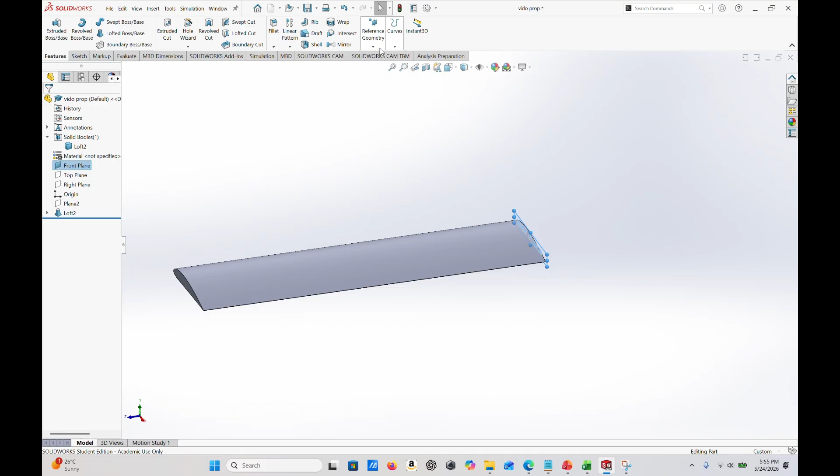So to start with, we're gonna want to make the front plane visible, and after that we're gonna wanna make two reference geometries. First we're gonna make the first plane, and we want to make sure that the offset is flipped. So click on flip offset and change this value to 17.42, and then click OK. You can clearly see we use the front plane as our first reference.

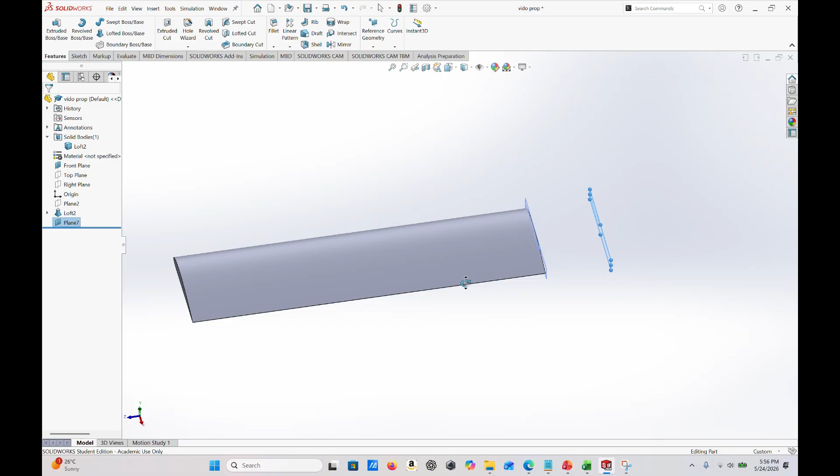And click OK. We want to also make another reference geometry. By this time we are selecting plane 7, so the first reference is the plane 7, and we want to make it so it's 10.58 but on the opposite direction. So click on flip offset and change 17.42 to 10.58.

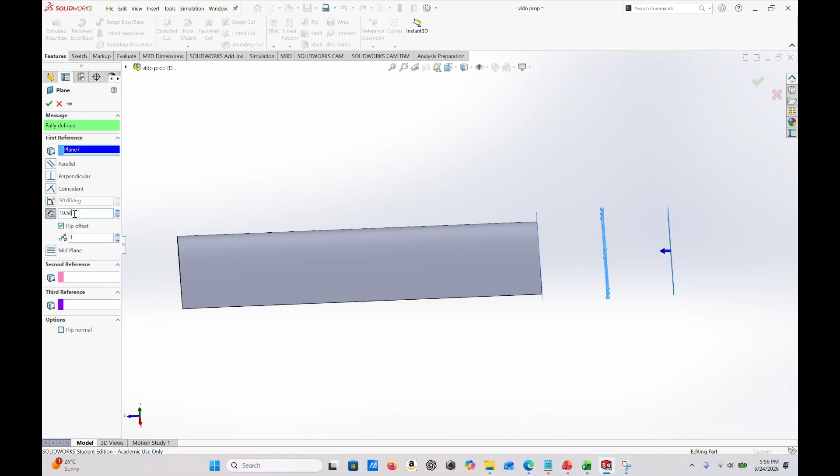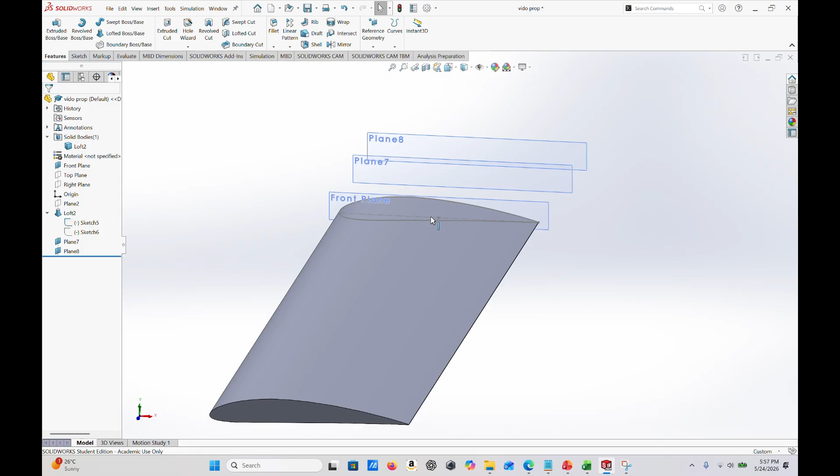And this is where we're going to draw some ovals which will connect the blades to the oval parts, which is then going to be connected directly to the disc in the center. So we want to first show you guys how to draw the center line and the center point. We need it because we want to line up the oval with the center line. In the video when I made the untwisted propeller, this wasn't shown clearly, but in the twisted one we have shown. But I'm gonna delete them and redo it for you guys.

So first click on edit sketch on the front plane. You can see it is connected from the origin to the trailing edge in the center. So let me just select those, delete them and show you guys how it's done. First go onto the line, onto the arrow, there will be center line. Click on it and just drag the line from the origin to the center between the trailing edge.

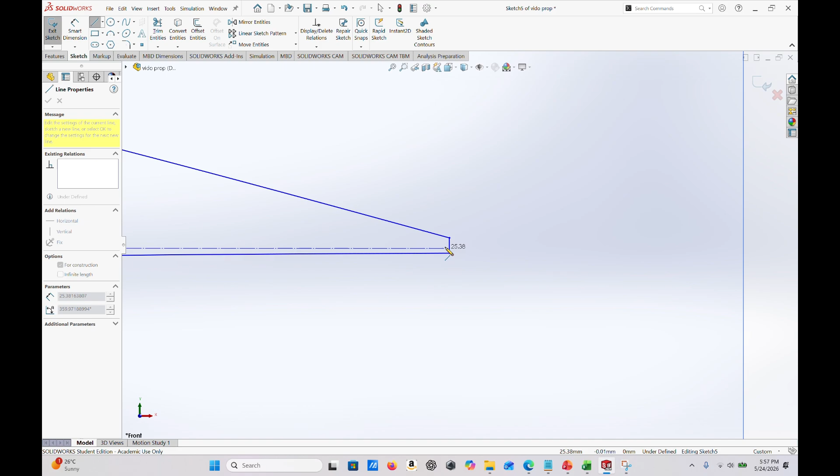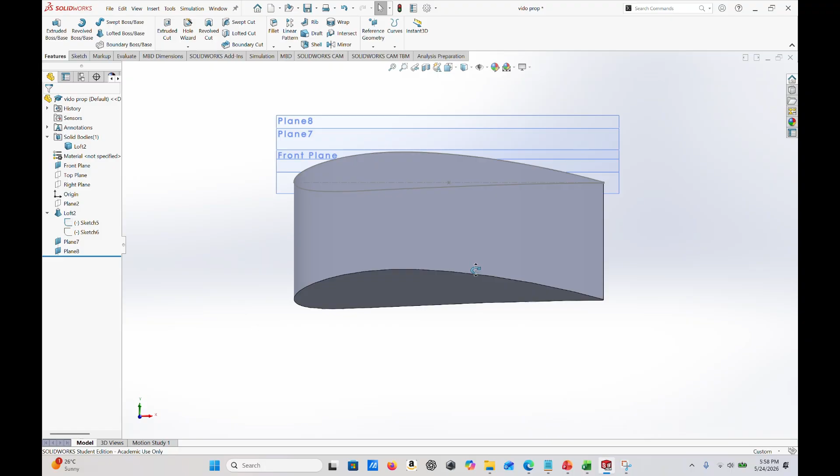And then click on the dot, and then hover over that line, and you can see the yellow dot. You want to click onto the yellow dot, which will give you a point. So we can use that point to make it easier for us to draw the oval. And when we overlay plane 7 and front plane, or plane 8 and front plane, it makes it easier for us to position that oval and make it straight.

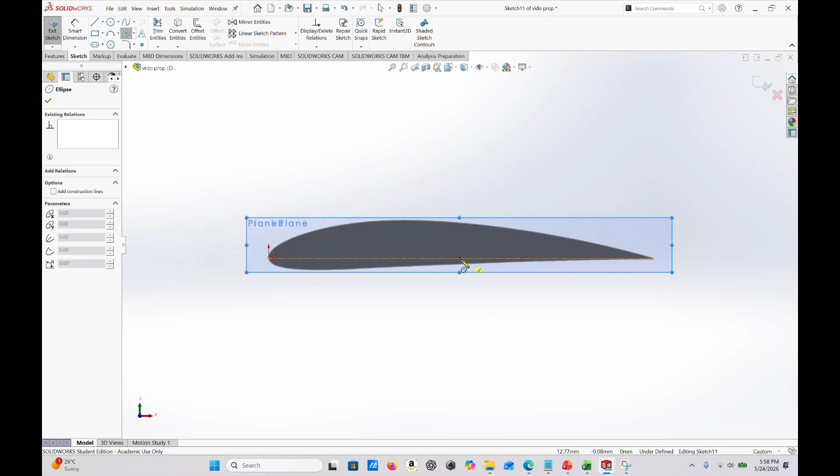So we are editing plane 7, as you can see, and now we want to draw an oval. So we're going to click on this oval shape and then just drag from the center, or the point that we just made. Click on the left mouse once and then again twice, and then it will show you the values. Now on the left hand side, we're gonna need to edit this radius. So in the first one, we're gonna put 6.25.

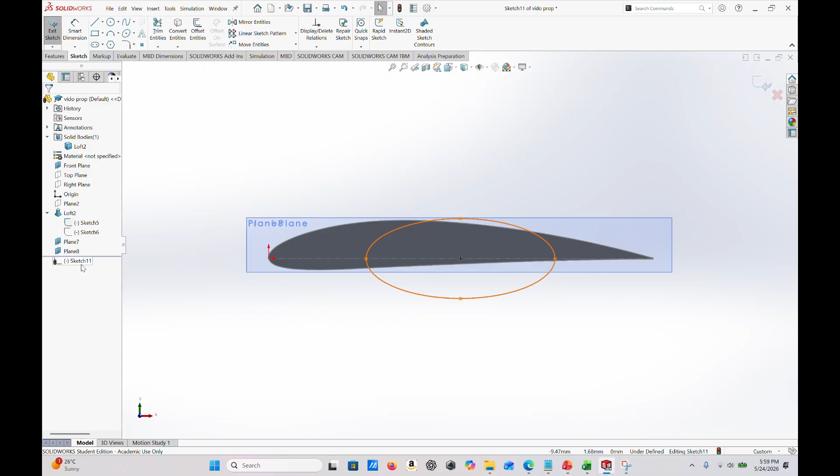And then click on it again. And then on the second one, we're gonna write 2.625. And it will change it. And this is how it's supposed to look like. We can exit. And now you can see how it's supposed to look like on this plane 7.

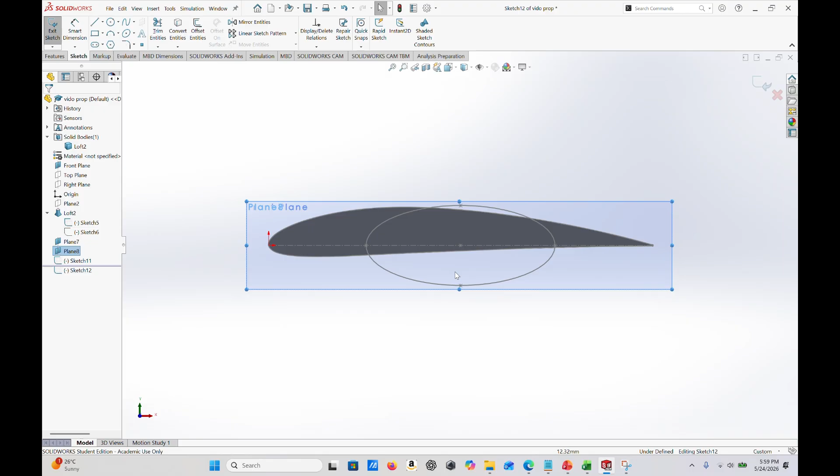Again, the planes can be named differently for you guys. Probably gonna be named plane 2, maybe, I'm not sure. But now we just want to go to plane 8 for me, and then edit the sketch. Click on the line and convert entity. So now it duplicates that oval onto plane 8. Now you guys understand how convert entities work.

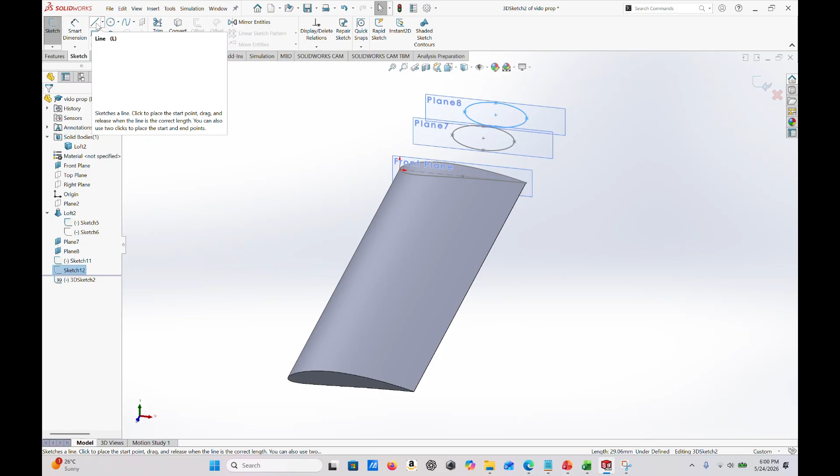Now you can see what we are trying to do, where we want to connect all these planes, the front plane, plane 7, plane 8 together. So we're going to go to 3D Sketch, and we're going to just insert lines where we're going to connect the leading edge to the left side of the oval and the trailing edge to the right side of the oval. So click on the dot.

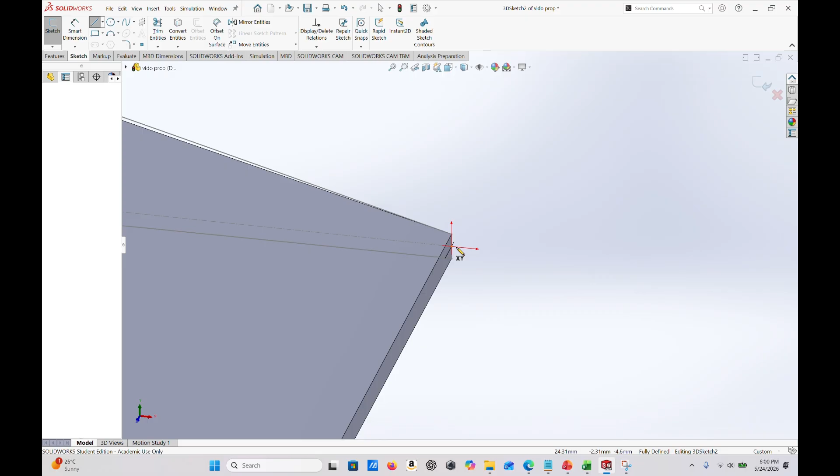You're going to see there's a dot. Just hover on it, click on it, and drag, and just connect these dots together as shown. We're going to do the same thing for the trailing edge. Make sure it's in the center of the trailing edge, and then just click on the dots on each side of the oval.

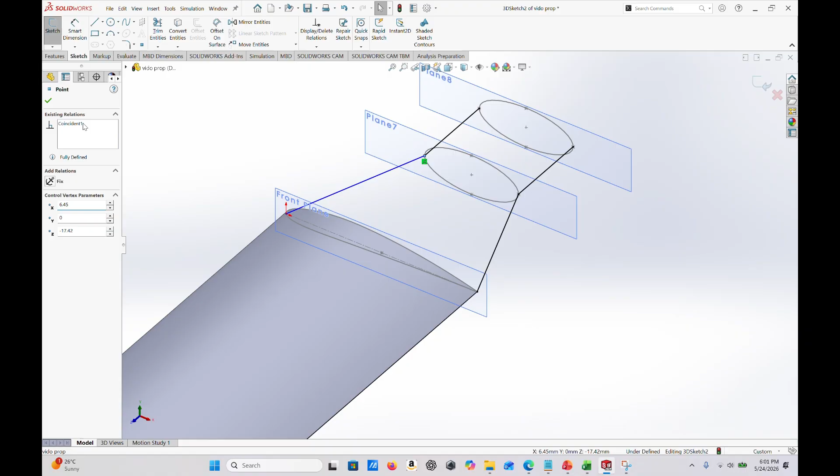And now you can escape this 3D sketch, and we're gonna use this while lofting, so the loft knows the lines that we want to have a limit on while lofting. And now we want to make sure that the existing relations, this is very important, are being deleted. You can either click on that small green icon, it will turn blue and then delete, or you can just delete it from the left hand side by just clicking on it and deleting.

And you're gonna do this for the 6 dots that you have done. So we've done the leading edge part. Now we're gonna do the trailing edge. Delete. I'm showing you guys both ways, so you can see you can delete it from the left hand side or on the front panel. Now that we're done, we're gonna use loft.

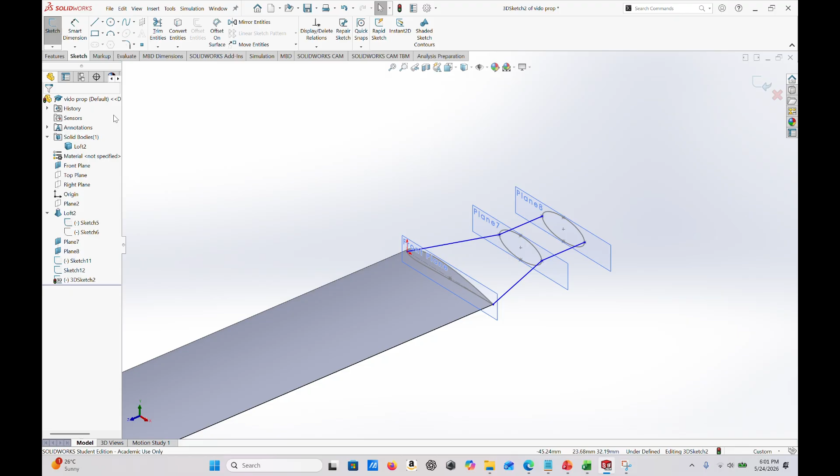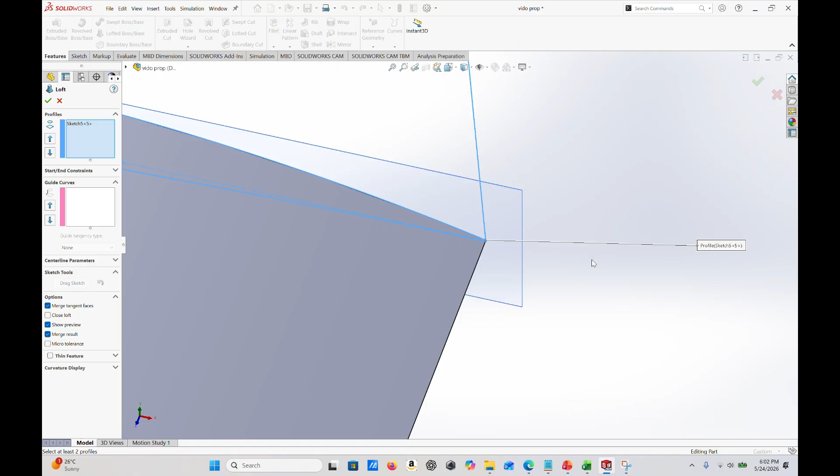And the reason why we remove the relations is because the loft will not work. It won't show us the option of using the 3D sketch because it is related to the other sketches, meaning the airfoil and the ovals. So now we're just gonna connect the sketches together. So we're gonna connect the airfoil to the 2 ovals. You have to do them in this consecutive order.

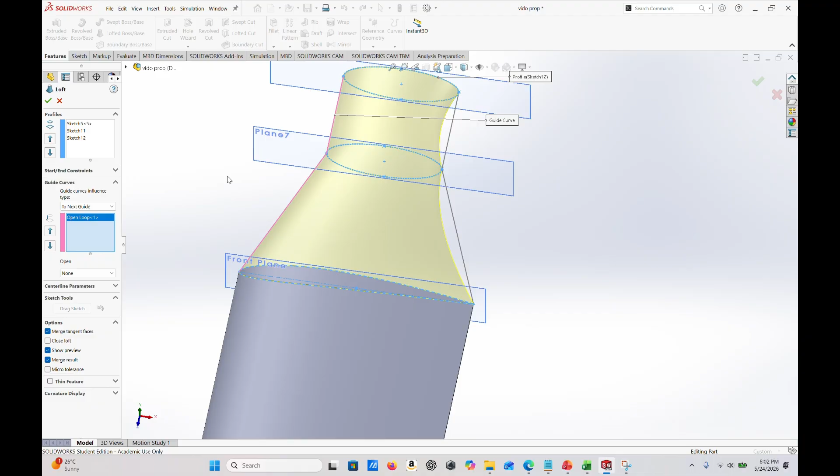So airfoil, then the first oval, then the second oval, and then go to guide curves and make sure you click on the 3D line. And you can click on this, which says OK. You can see how it's bent on one side. You want to do it on the other side. You just click on the line and click OK. And now you can see that everything is connected nicely. And also the trailing edge, you can see that it also shows the pattern on the oval.

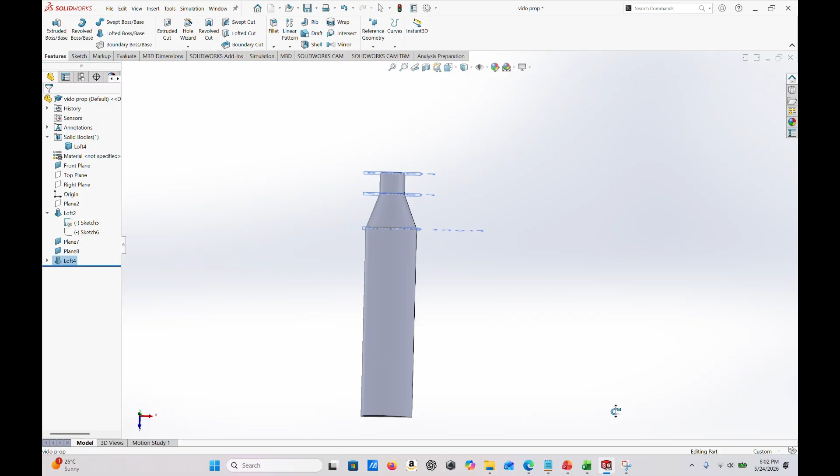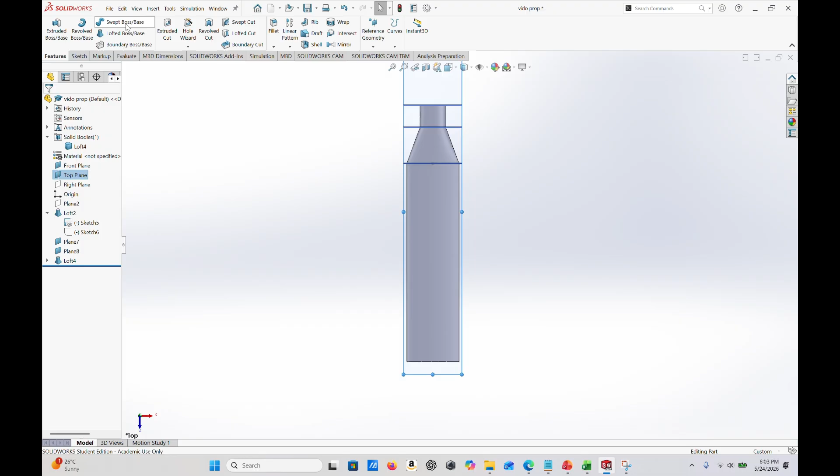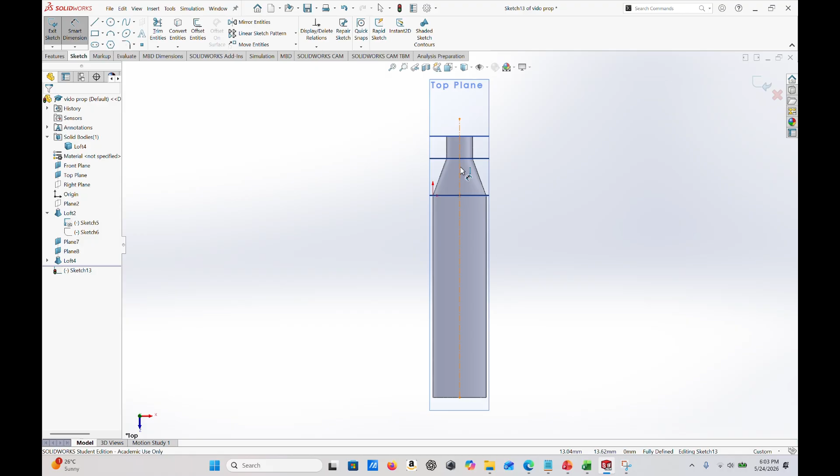So first we're gonna go to top plane and make that visible. And we're gonna construct a line so we know where the center of the radius of the circle for the disk is. So to do so, we want to do a sketch onto the top plane, and we're gonna make a construction line, or we can call it center line, and then just hover onto this, and you can see that you can select the center, and then just drag the line till ahead of the final oval. And then we can go to smart dimensions and change the value to 127, and you can see that the length of the line slightly changed, so it starts basically from the tip towards the center.

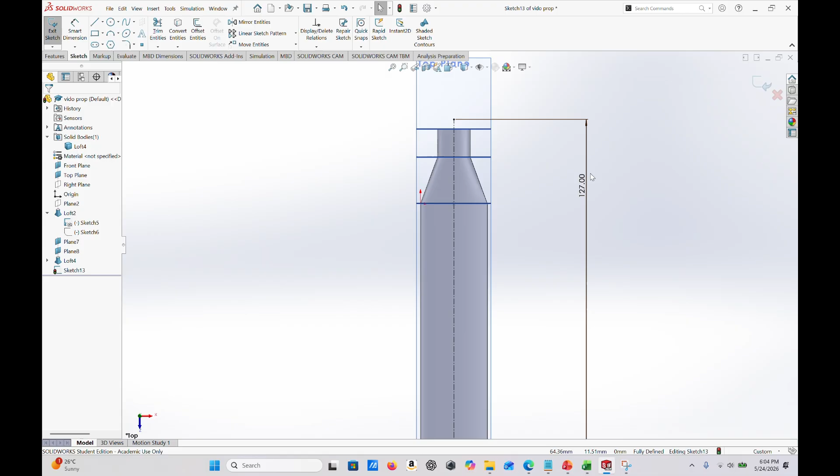Now we're gonna go and make a sketch on this top plane by just drawing a circle. And to do so, we're gonna just click on the circle and just drag the value. And here we're gonna choose a specific radius. In this case, we're gonna change the radius value to 31.75. You can use smart dimensions to change, but it's easier just to do it there on the left. And then just click OK.

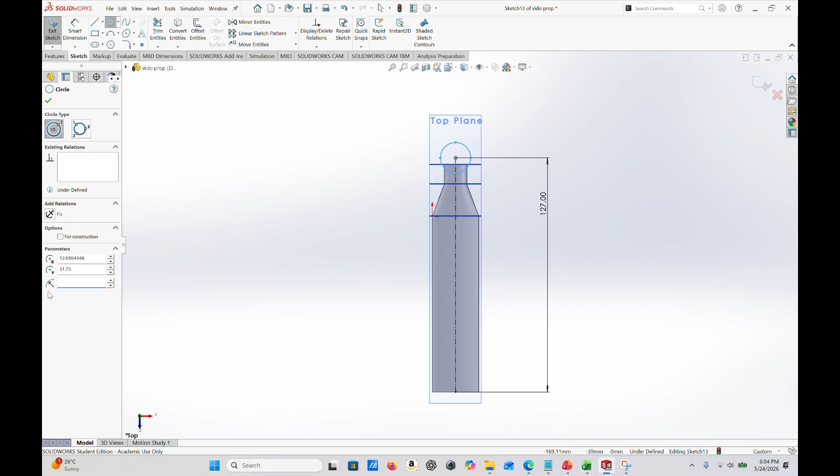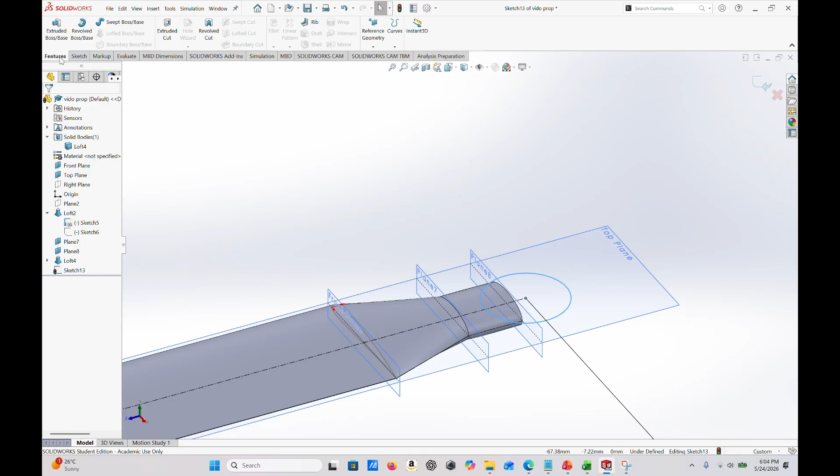You can exit sketch, but we don't want to do that now, because we're gonna want to extrude this. So we're gonna go to features and then to Boss-Extrude. And this automatically already does the circle. You can select the circle so it does it. You need to make sure that on direction one, it says mid plane and it says 6 millimeters. And there you have it. You're gonna have the disc being shown.

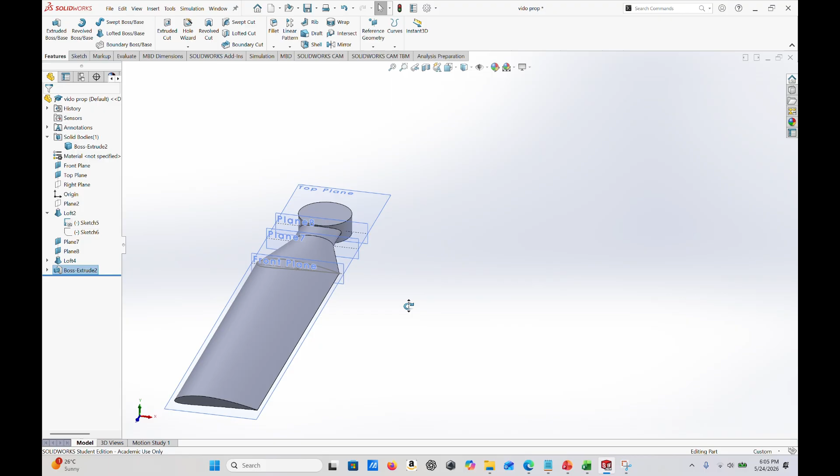And now we have made basically one half of the propeller, and all we have to do is just mirror this blade onto the other side, but we need to reverse directions. So if it spins 180 degrees, it actually is facing the same leading edge.

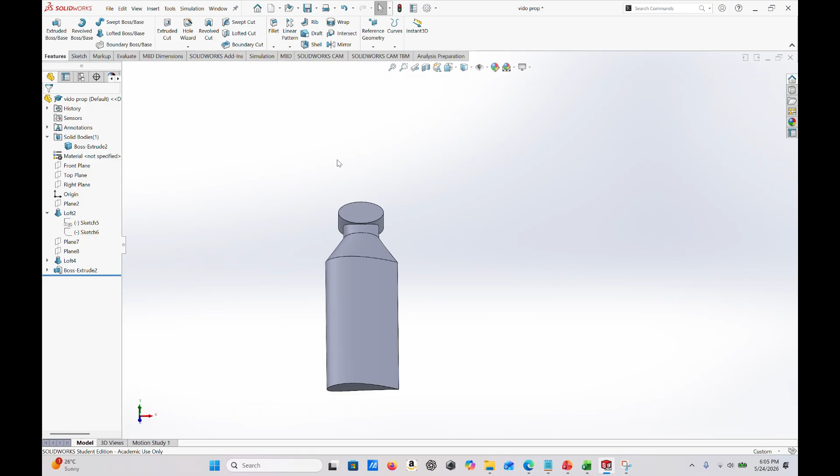So first we hide everything to make this simpler. We're gonna go to Boss-Extrude and we wanna make sure that the sketch is showing, because we're gonna need that point in the middle to actually do some reference geometries so we can mirror about that point.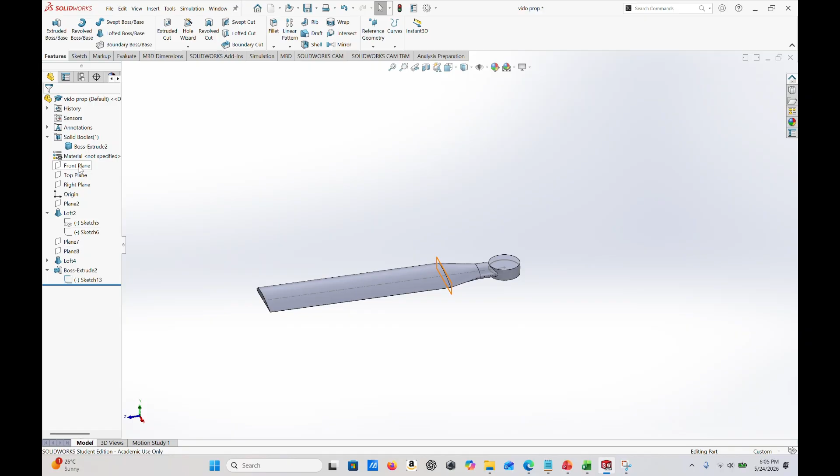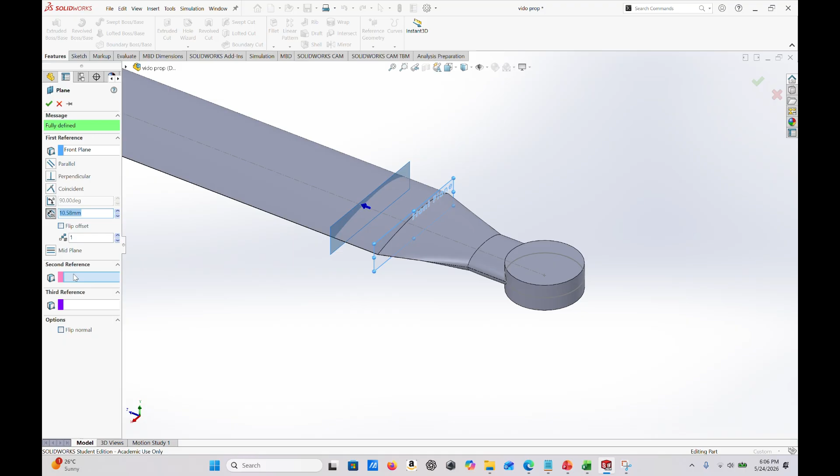First, we're gonna make the front plane visible and then we're gonna go to reference geometry and click on plane. Click on the front plane and then in the second reference, just click on the dot. And now you've made a plane right onto the dot, which is what we wanted. And we're gonna change the name of the plane to symmetry plane for simplicity.

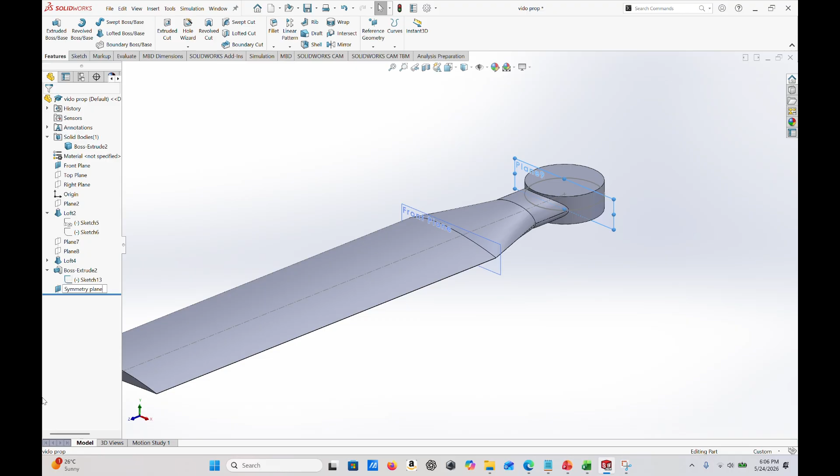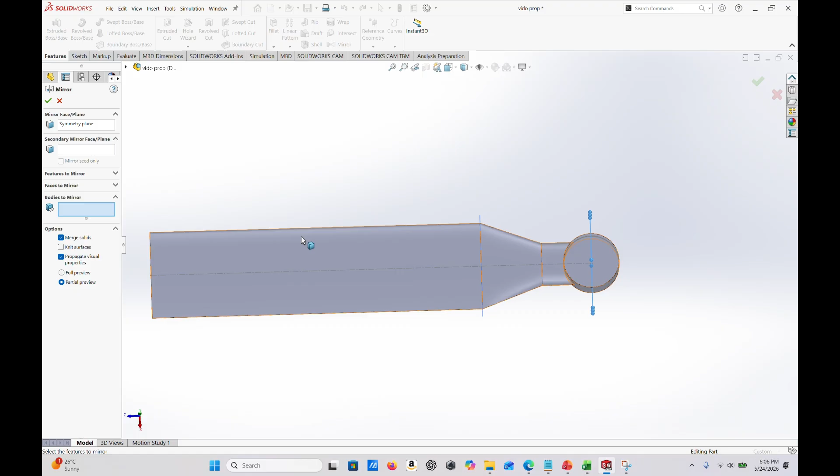We're gonna now mirror the blade, the solid, onto the symmetry plane. So click on the symmetry plane on mirror face/plane, and for the bodies to mirror, just select the body. And you can see the other side being shown. You have to make sure that the merge solids is off because we're not gonna actually use this, because you're gonna see that the leading edges both are facing in the same direction, which is not correct.

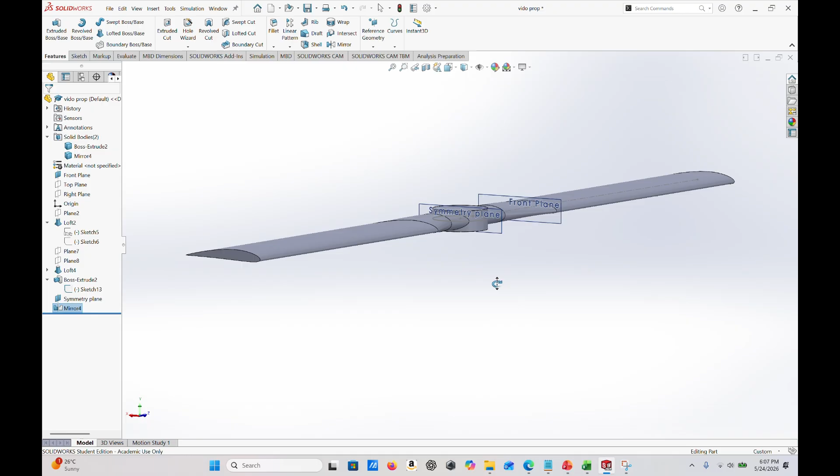If you look at the traditional propeller, the leading edge would be facing in the opposite direction on the opposite side, because after a 180-degree turn, we want the leading edge to be facing the same way. Imagine if the airflow was rotating around this. One of them would be facing the trailing edge.

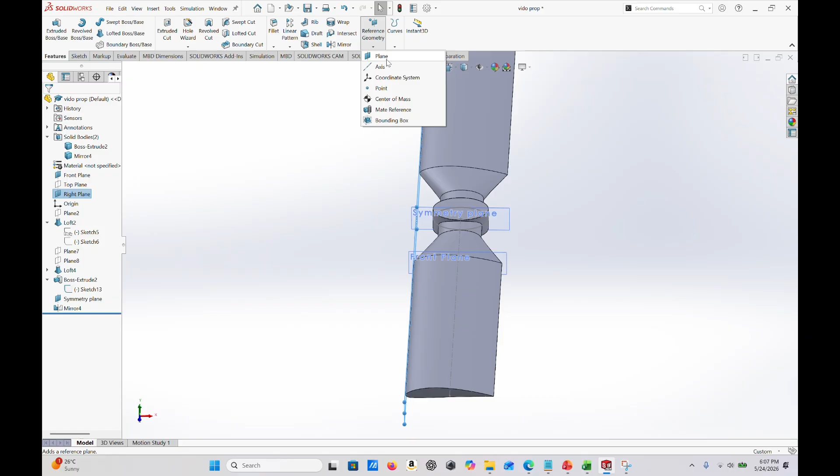So we're gonna fix this by going to right plane, showing it, and going to reference geometry. And then you can do again the second reference being the dot in the center or the line at this point, but we're gonna just select the dot for simplicity. And now you have a reference plane in the center along the blade's axis.

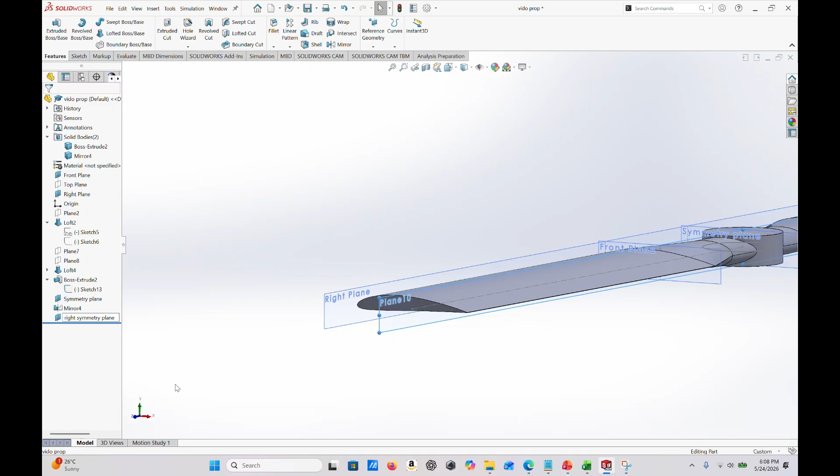Now we can just hide the extra planes that we don't need. But first let me rename this to right symmetry plane. We're gonna hide the front plane and the right plane to make it more visual.

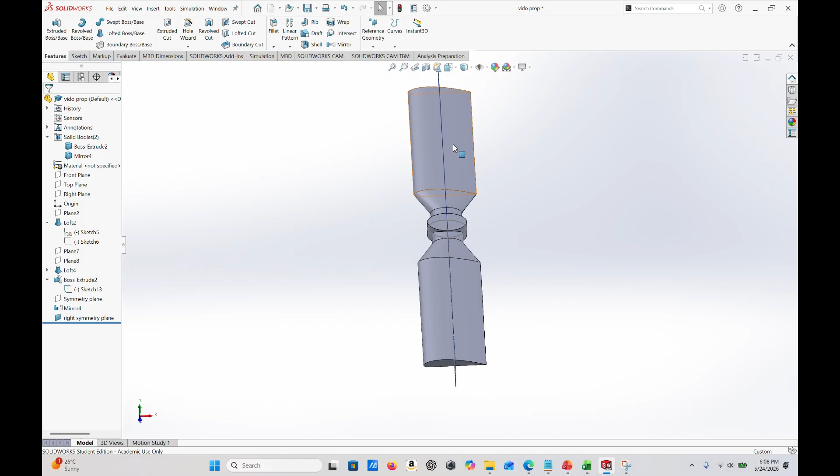Now using the right symmetry plane, we're gonna wanna mirror the mirrored, so the mirror 4 or whatever mirror it's called on solid body. You're gonna basically select the right symmetry plane and then just mirror the body that you already made, the new one, the one with the wrong leading edge. And you can see how the leading edge is now the trailing edge. And make sure that the merge solids is off.

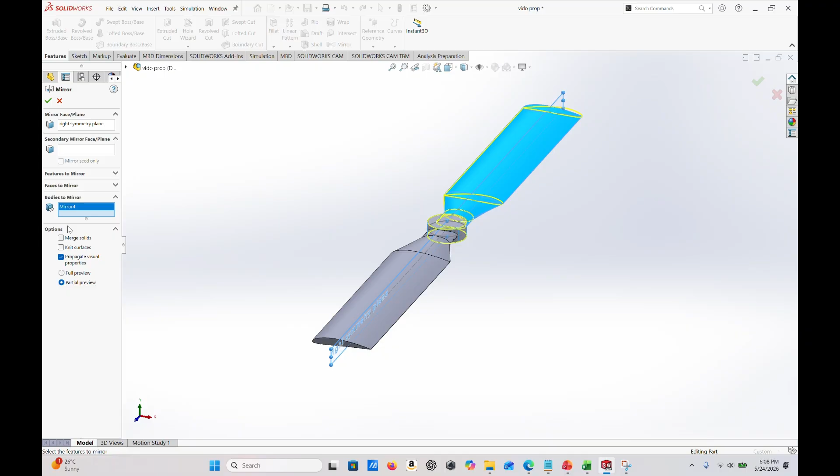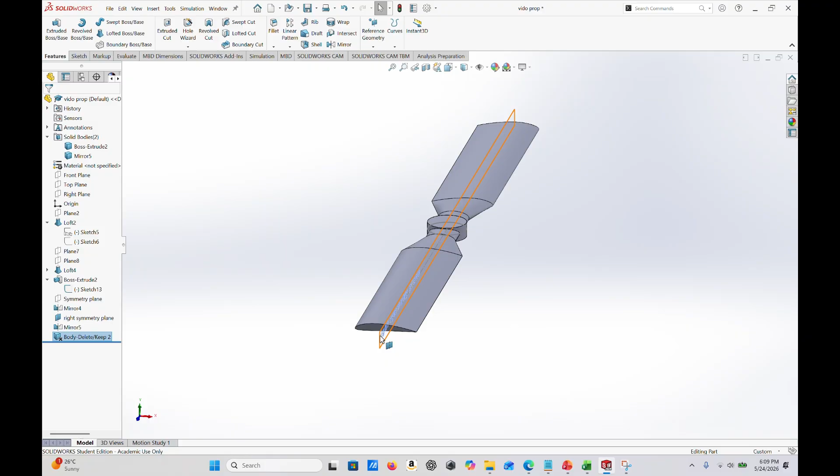Now click OK, and you'll see this weird looking shape with both leading edges on each side overtaking the trailing edge. So we're gonna delete the previous mirror now that we've used it and just click on delete body. Now you can see that we have completely made the propeller, but we also want to make sure that it is recognized as one.

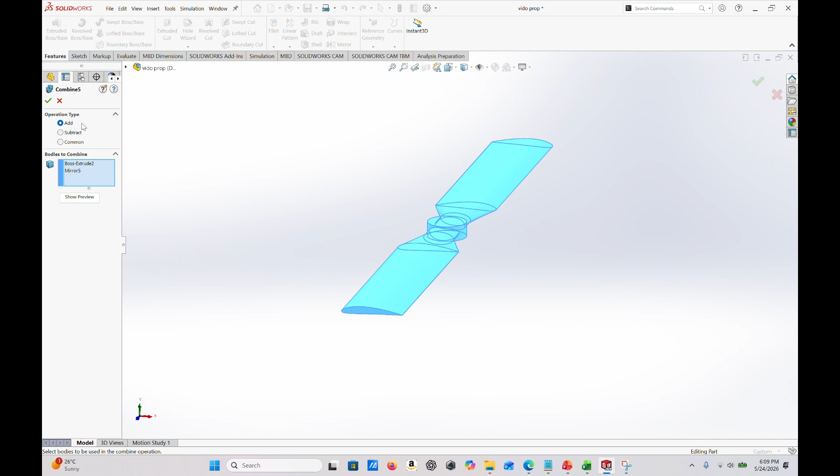So we're gonna combine, in solid bodies on the left, the Boss-Extrude and the mirror. Just click on both of them by holding Control, and then just right click and you can combine. And make sure the operation is at add and then click OK. Now it's combine 5, or it might be just combine 1 for you. And this is exactly what it's supposed to look like.

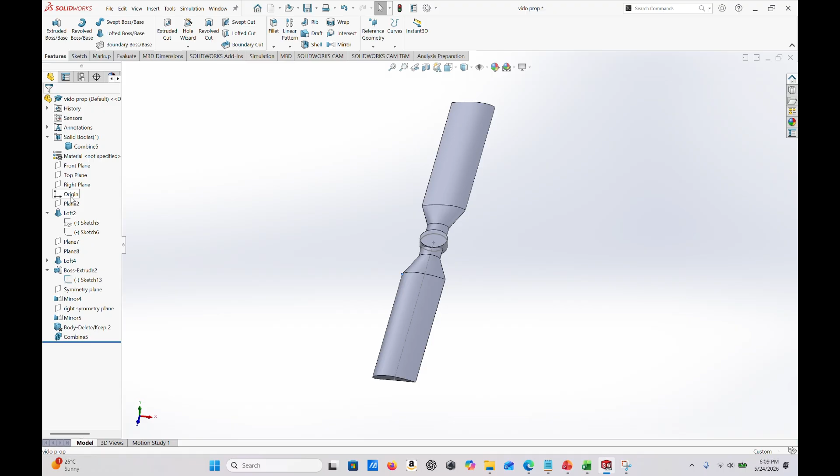But the final thing that we need is that we want the origin to be in the center. So we're gonna have to move the whole body. First, let's make the sketch center point that we made visible, and the origin is always visible.

Go on to the top right and write move, and you can see something called move/copy. We first go to translate, click onto the dot in the center, and then it gives you a point where you want to move from one point to the other. We're going to click on the origin, and then finally click on the bodies to move. We're going to click on the body we want to move, and then hit OK.

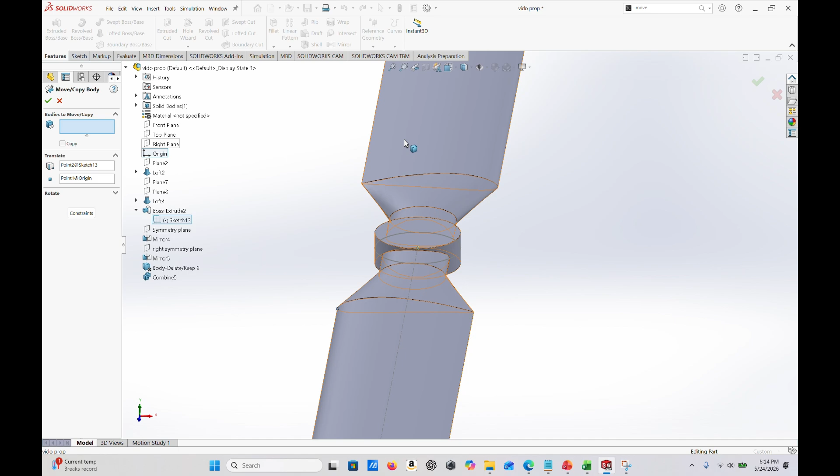And the reason why we want to move this to the origin is so when we import this to SpaceClaim in CFD and ANSYS, it's gonna be in the center. And there you have it. We've completed the propeller, and it's all ready to go to ANSYS.